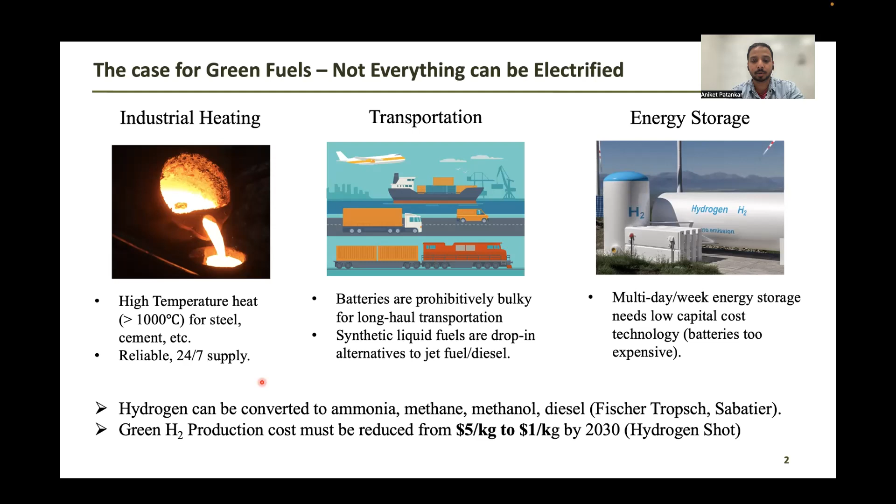So hydrogen is really a linchpin green fuel because it can be converted into other energy carriers like ammonia, methane, and even liquid hydrocarbons like diesel using well-known processes like Fischer-Tropsch. The problem, though, is that green hydrogen is too costly to produce. The US Department of Energy recently launched a hydrogen shot, which aims to reduce the cost of producing green hydrogen from the current $5 per kg to $1 per kg.

So hydrogen has been seen as the fuel of the future for several decades now. So what's different this time that gives us reason for optimism? It's very likely the low cost of renewables like solar and wind. The cheap renewables can translate into cheap hydrogen, but we argue that it requires some amount of storage because these renewables are intermittent. So here I'm showing different renewable technologies, their capacity factors and their levelized cost of electricity, LCOE. The first observation is that the LCOE is quite low in cents per kilowatt hour.

And the second is that there is a trade-off between capacity factor and LCOE. Solar PV has a capacity factor of only about 30%. This is not the amount of time the sun shines on average, but rather how much average power we can get from a solar panel compared to its peak power. So as the capacity factor increases, the LCOE, or the levelized cost of electricity, also increases.

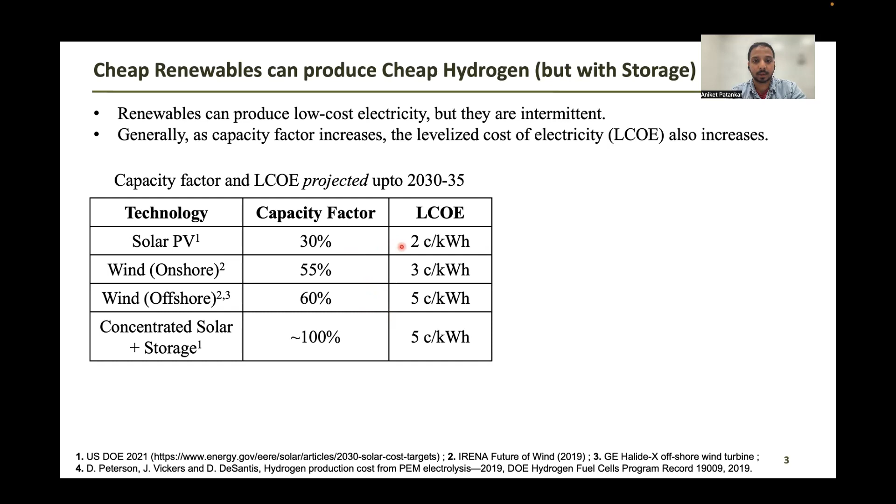So if you're using electricity to do electrolysis and produce hydrogen, going to solar PV will give us the cheapest electricity, but the low capacity factor will cause a much larger electrolyzer system to be used and make it more expensive. If we directly couple solar PV to electrolysis, they both will have the same capacity factor. And obviously the capex, or the size of the electrolyzer system we need, goes inversely as the capacity factor.

So with this LCOE capacity factor trade-off, the cost of producing hydrogen will very likely remain about $2 per kilogram, even with the technology and manufacturing improvements expected by 2035. And this was from a DOE study for PEM electrolysis. So there is a need for alternative technologies which can meet that $1 per kilogram price target by 2030.

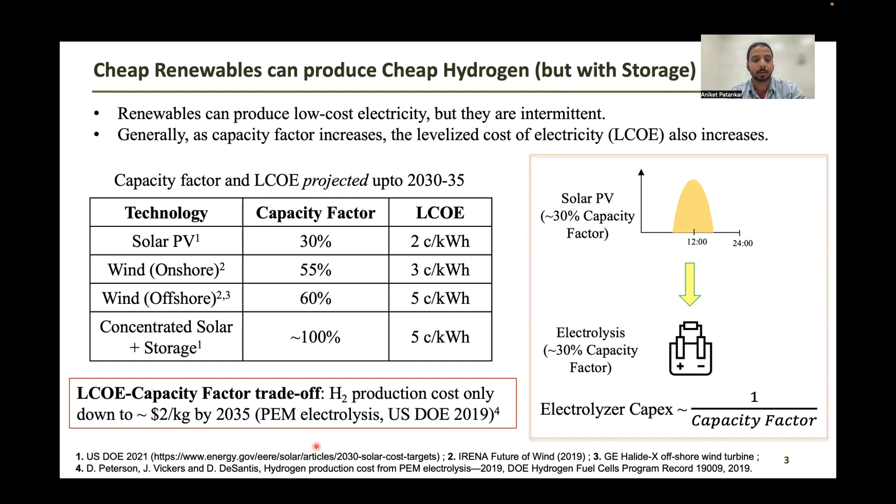There is an alternative technology called solar thermochemical hydrogen production. This involves heat to hydrogen rather than electricity to hydrogen. We take in either concentrated solar heat or solar and wind electricity, and this can be stored at low cost in a thermal energy storage. The key here is that thermal energy storage is up to 10 times cheaper than batteries.

So it can serve as an economic buffer between the intermittent renewables and the reactor system, where we'll be converting that renewable energy into hydrogen. Our thermochemical water splitting system can then operate 24/7 using this thermal energy storage. Here I'm showing a schematic for the solar thermochemical hydrogen production. We use cerium oxide as a catalyst, which stays within the cycle.

There's a high temperature thermal reduction step where at around 1500 degrees C and reduced oxygen partial pressure, we drive the reduction of ceria by creating vacancies in its lattice structure to give up some of its oxygen. And then this reduced CeO2-δ is brought to a lower temperature, 800 degrees C, where we can pass steam over it, and the steam oxidizes the ceria to CeO2 and produces hydrogen as byproduct.

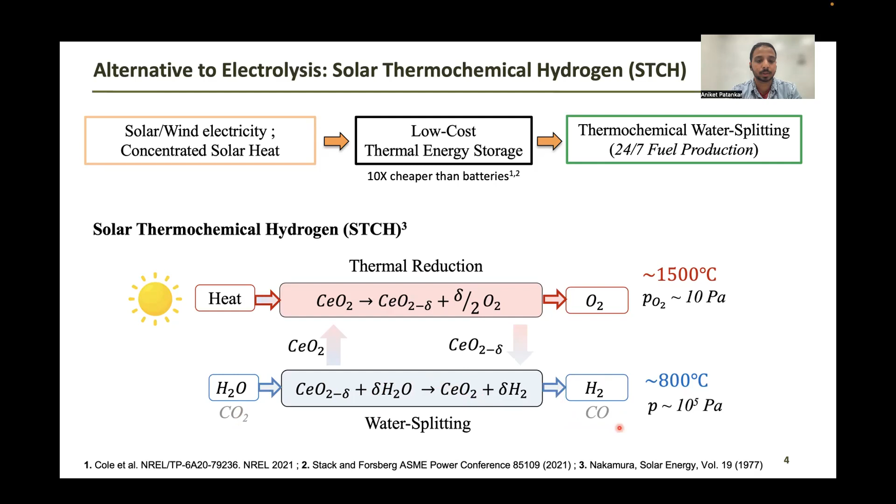We can also use carbon dioxide as an oxidizing agent, in which case we produce carbon monoxide. And this is also a way to produce syngas with tunable composition, the H2 to CO ratio. So this can also be a means for CO2 reuse. This technology has been around for a while, since the 1977 paper by Nakamura. But we see that the state-of-the-art systems for thermochemical hydrogen production only have a 7% heat to hydrogen efficiency.

This is the state-of-the-art system which they demonstrated in Europe in 2020. It consisted of a heliostat field that concentrated solar heat to a receiver reactor sitting on top of a tower. The ceria was kept up here in the reactor, and it went through this thermochemical cycle, which we spoke about a couple of slides back.

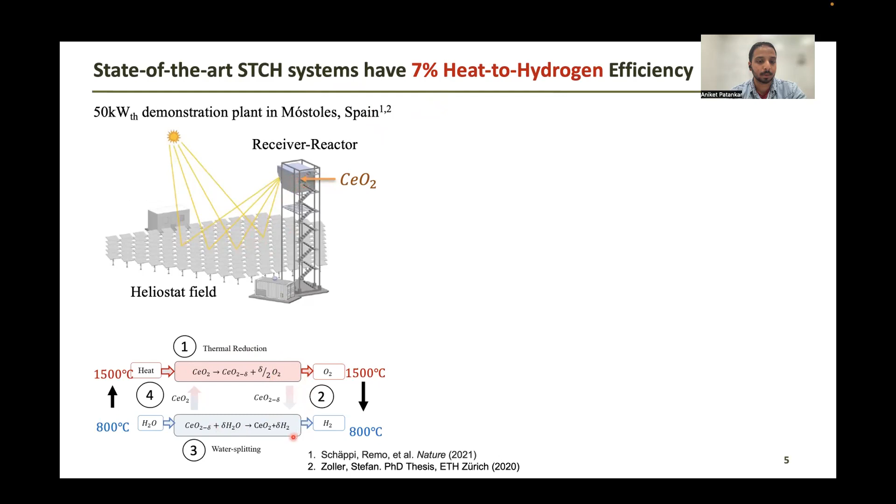Some of the reasons for this low heat to hydrogen efficiency is firstly the lack of heat recovery. So as the ceria cools down from 1500 to 800 degrees C, the heat is lost to the atmosphere. And there is additional heat requirement to heat up the ceria and the reactor from 800 to 1500 degrees C. So 60% of the net energy input to the reactor just goes up in this sensible energy increase that is subsequently lost in the cool down step.

So some solutions have been proposed which include internal heat recovery. So we use the heat from ceria as it cools down and transfer it to the ceria that is heating up. And that way we can gain some of the efficiency losses.

The second major source of efficiency loss is oxygen removal. So this low pressure is required to drive the reduction of ceria as seen here. And vacuum pumping or other solutions to have this low pressure oxygen pumping are quite energy intensive. So that also represents a significant source of inefficiency.

The third factor, which is not really a cause of inefficiency, but operational difficulties here, is that the solar collection and the reactor are closely coupled. We use a receiver reactor, and that makes it difficult to use multi-hour storage, which we argued was one of the good things about the thermochemical system, that we can store heat at low cost. So it's difficult to incorporate multi-hour storage in these directly radiated systems.

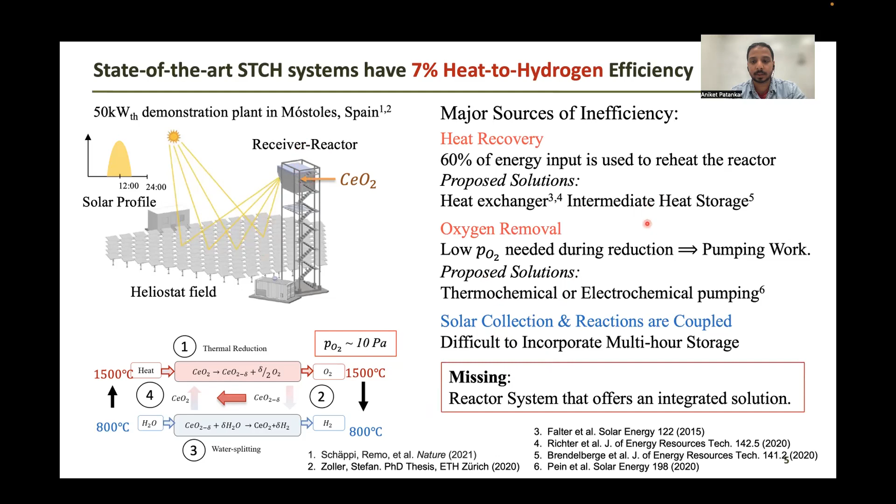There are solutions like refractory fire bricks, which can store heat at high temperatures for several hours, but it's difficult to couple that with a reactor receiver like this. So although these individual pieces have their own solutions, what is missing is a reactor system that offers an integrated solution for all of these issues.

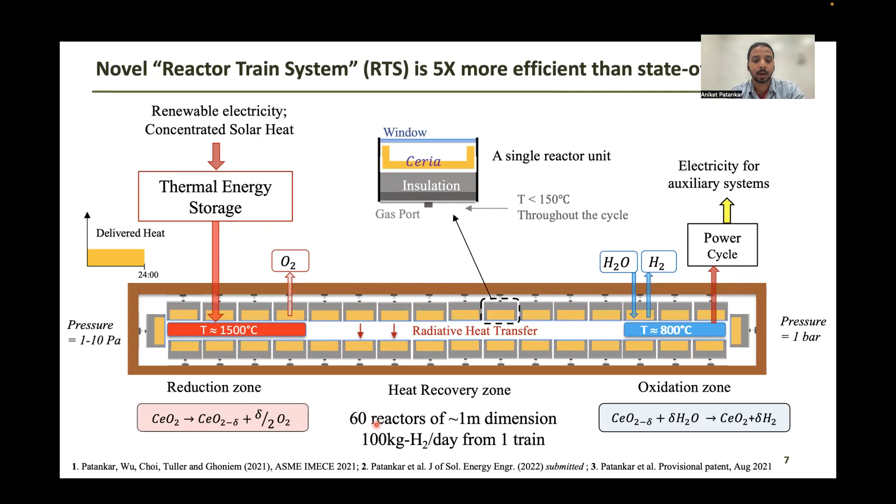These are some of the results from our analysis, which have been presented before in 1 and 2. These are the temperature profiles within the reactor trains. So the red circles are the hot reactors in the heat recovery zone, and the blue crosses are the cold reactors. And we see a nice counterflow heat exchanger profile between them. And we get more than 80% heat recovery effectiveness with this design.

These are the energy flows. So the heat source or the emitter, the heat supplied by the thermal energy storage, is about 500 kilowatt on average. And we can calculate a heat-to-fuel conversion efficiency, which is the high heating value of hydrogen produced divided by the heat input, which comes out to about 31%, which is several times that of the 7%, which is the current state of the art.

We also recover a lot of heat. This is the heat recovered in the radiative heat recovery zone. And in fact, this is higher than the energy supplied by the heat source. We also have about 350 kilowatt of energy that's harvested in the heat sink. And this waste heat can be converted into electricity and used for oxygen pumping.

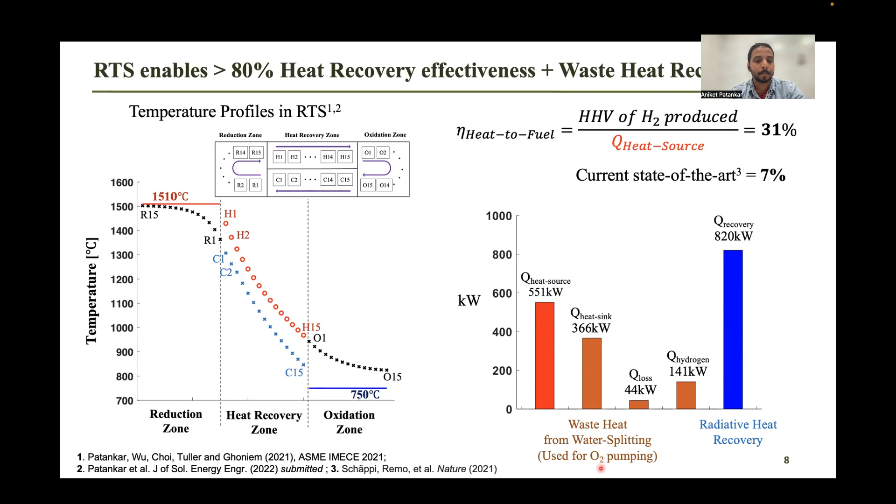Here are some more details about the mass transfer system, where we use retractable connectors to communicate with the gas ports on the reactor. And again, we emphasize that the temperature outside of the reactor is quite low. So these are the temperature profiles within the insulation thickness. It's about 20 centimeter thick insulation.

And because the thermal diffusivity within the insulation is quite low, the high temperature cycles are only felt by the top layer of the insulation, whereas the outer surface remains at a fairly low temperature throughout the system. So all the moving contacts, including the mass transfer ports, are in this low temperature outer surface.

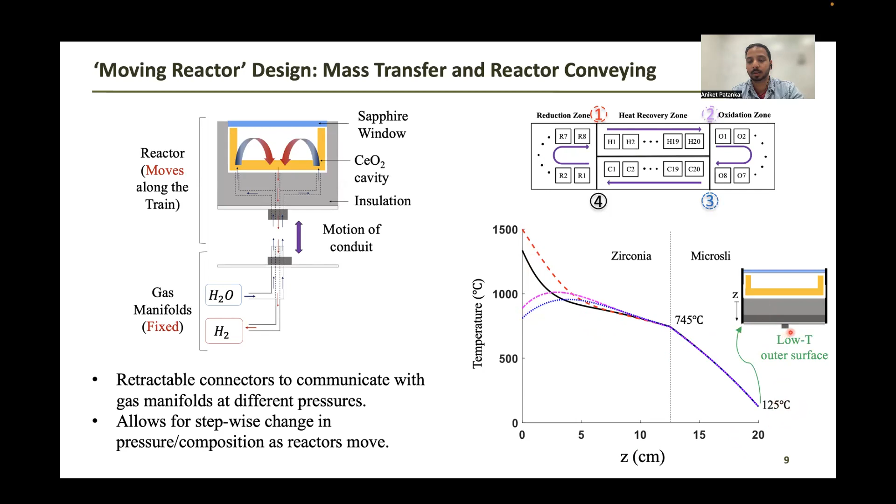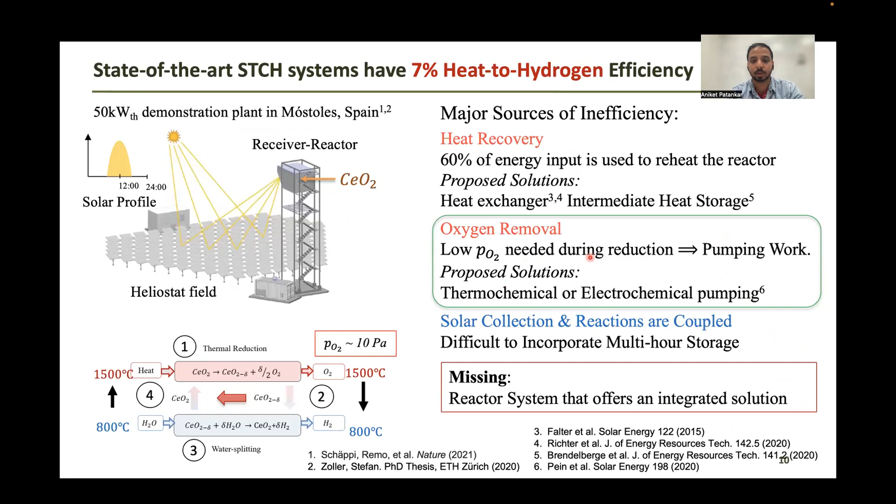So the second challenge with the reactor train system, or thermochemical cycles in general, was the oxygen removal energy penalty. So this is the ceria cycle, where we would like to remove oxygen at a fairly low pressure. And we have some waste heat at the oxidation zone to drive this oxygen removal process. The previous result, the 31% value, came from vacuum pumps.

But vacuum pumps have a very low efficiency, less than 5% second law efficiency at low pressures of 10 pascals. And low pressure oxygen flow has a very high volumetric flow rate because of the ideal gas law. So the pumps required are large and very capex intensive.

An alternative is thermochemical oxygen pumping, where we use a second redox cycle to pump the oxygen. So this is very similar to the ceria cycle. We use strontium iron oxide, SFO, as the catalyst here. And here there's a high temperature reduction of ceria, and the oxygen is absorbed by a low temperature oxidation of the SFO. So the oxidation step is on top here, and the reduction step is on the bottom. And the reduction is again thermally driven, but at a much lower temperature than the 1500 degrees C.

So this effectively operates like a pump. It takes in oxygen at a very low pressure, and it releases oxygen at the 1 bar ambient pressure that we want. The good thing about this is that it's purely heat driven. It doesn't require electricity. So you can use the heat from the oxidation zone directly for the regeneration or reduction of the SFO step. This cycle has been studied previously, and many of these pumping materials are also used in thermochemical energy storage, so they are relatively well studied.

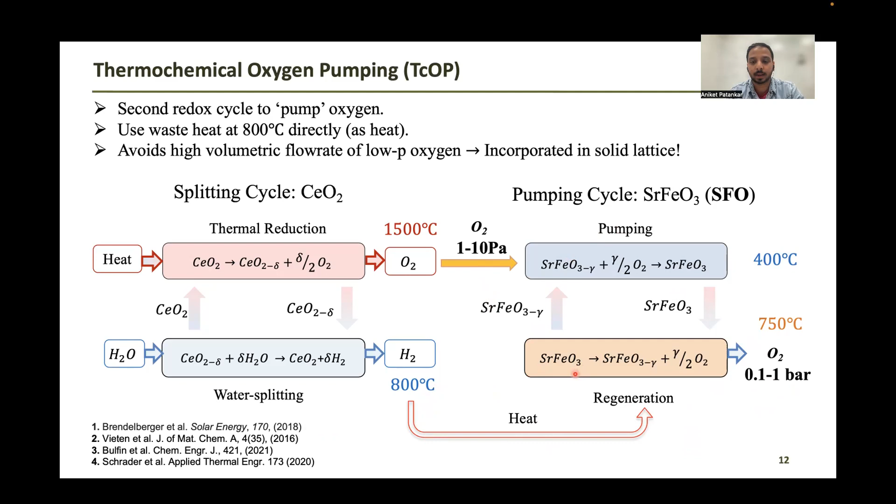The trick here was, again, how do we integrate this into a reactor system? So this is our idea of integrating thermochemical oxygen pumping with the reactor train system. We use moving SFO reactors similar to the ceria reactors. So we have an inner train of ceria reactors and an outer train of SFO reactors. And the key is, because these are mobile reactors, we can move them in opposite directions. So here the ceria moves clockwise and it releases oxygen to the SFO reactors.

And in the next step, the SFO reactors move counterclockwise one step, where they get regenerated here. The oxygen is removed at 1 bar, and then the SFO reactors are sent back. And the good thing with this is that we can reach very low oxygen partial pressures, less than 1 pascal, with the thermodynamic study that we did. And this enables us to reach very high heat-to-hydrogen efficiencies, more than 40%.

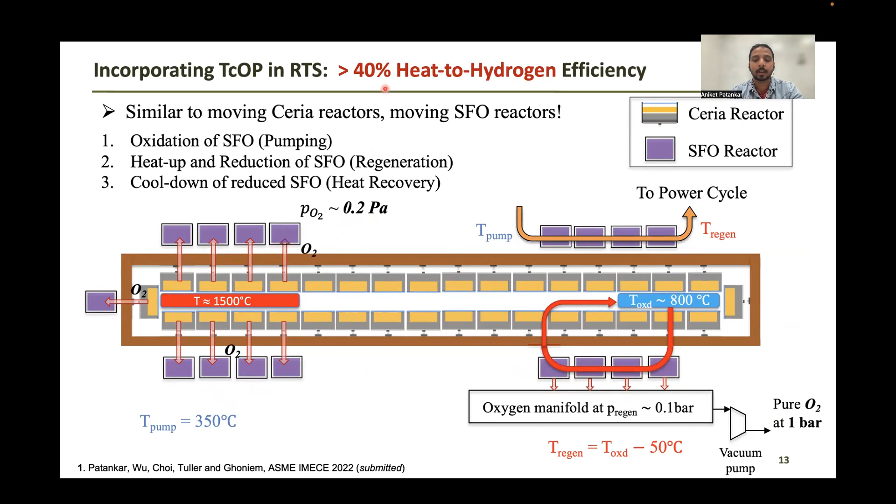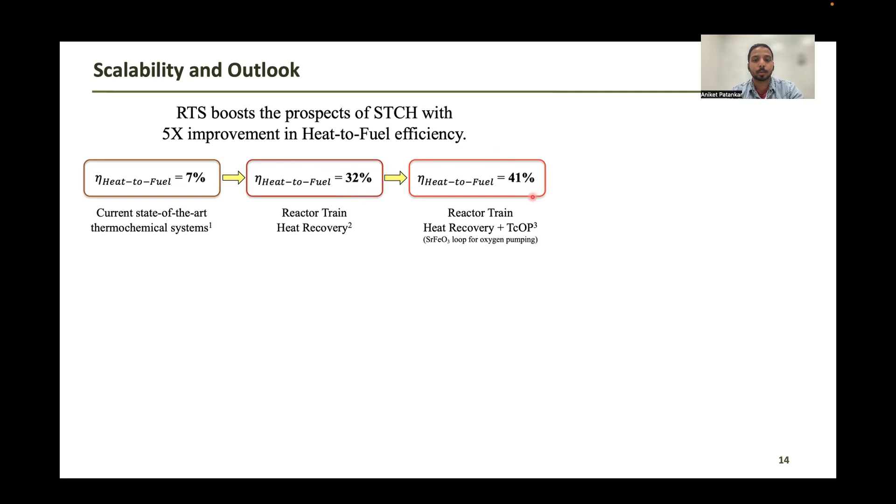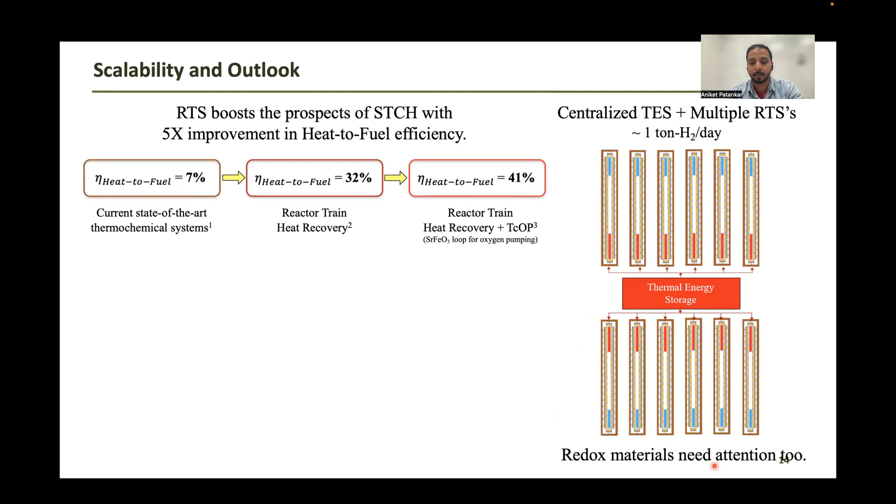There is continuing attention towards better redox materials than ceria, that have more efficiency and are also cheaper and more abundant than ceria. While the 41% efficiency we report is impressive, electrolyzers operate at a much higher efficiency, but that is electricity to fuel. So again, here the thermal energy storage can really brighten up the economics, because it can be charged up within a few hours of the day, 2 to 4 hours, when electricity prices are low.

So in a solar PV dominated region, 11 a.m. to 3 p.m. would be a time when electricity prices are very low, and the TES can be charged up exclusively in that low electricity price time. And we also benefit from the high capacity factor enabled by the thermal energy storage.